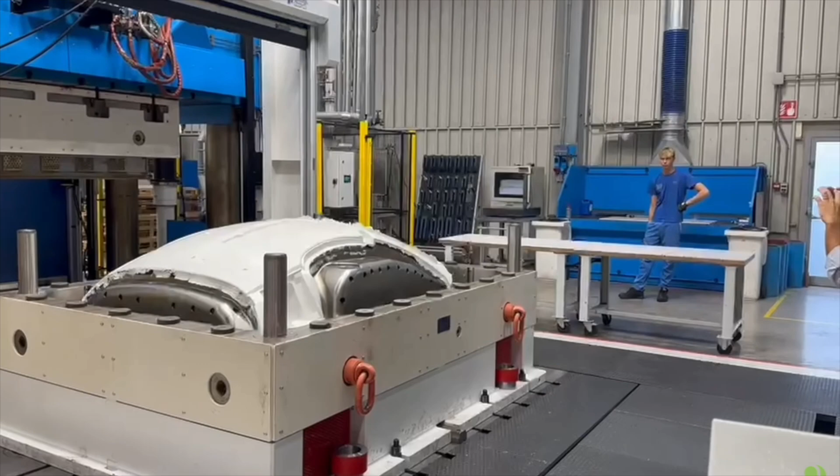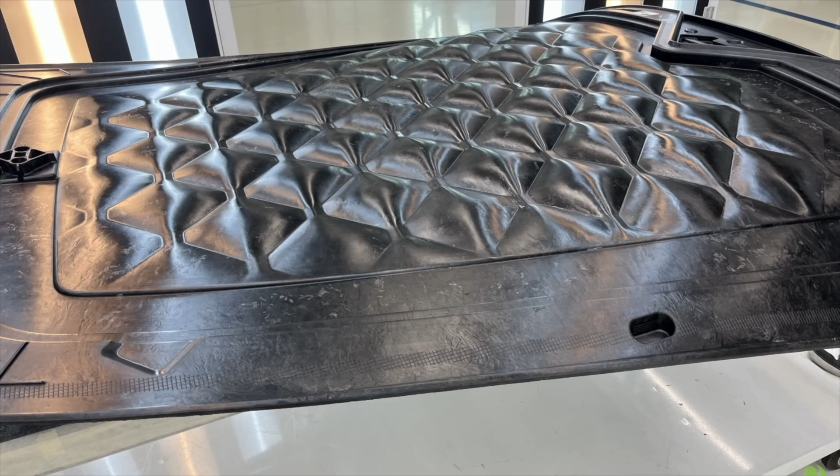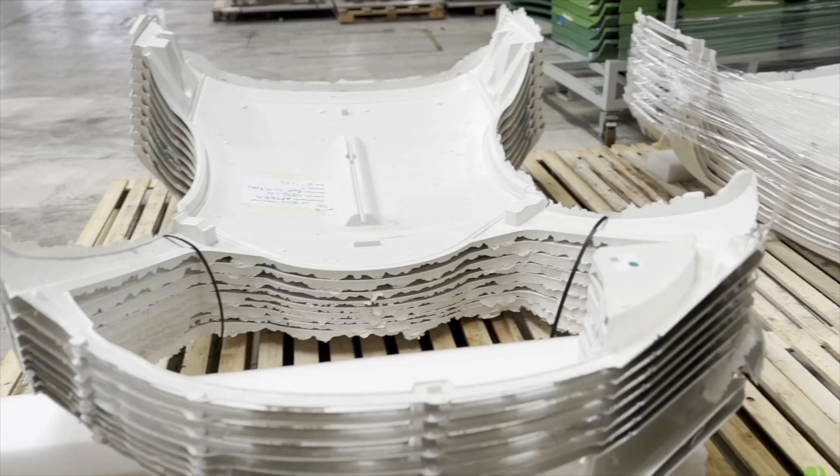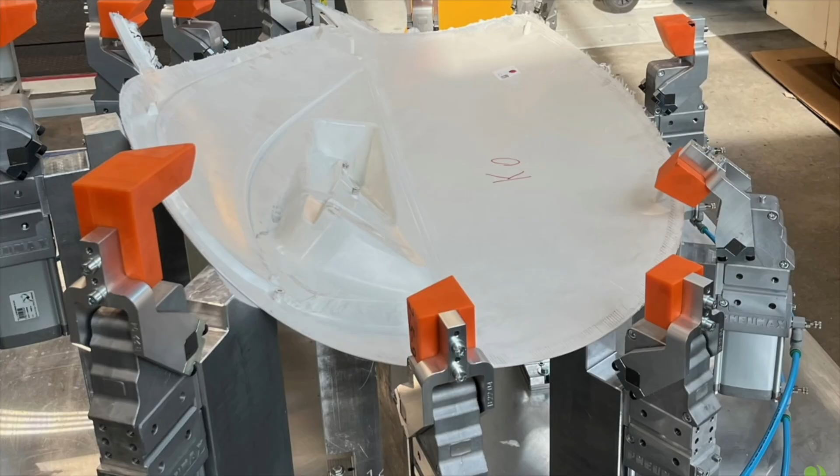Speaking of a better way of doing things, or a different way of doing things, let's back up for a moment. What is the value proposition of the Aptera? How is it different from other EVs on the market today? Aptera has a singular mission: to make every journey powered by the sun. That mission guides us in the development of this product and bringing it to market, but also in our business development for other segments. We have technologies now, this rich IP portfolio that's quite extensive, that can be leveraged in other industries altogether. That vision of every journey powered by the sun is really what guides us.

It's what will guide future product creation. It'll always drive efficiencies more so than any other kind of quasi-competitor in the space, because our focus is on how to make the journey powered by the sun — more and more of the journey, not just 40 miles, but 50, 60, 100 miles. How do we make more of it powered by the sun? That's going to create an eternal pressure for the company to make things more lightweight, more efficient, to always have the most energy dense batteries, the most efficient solar panels, and the most efficient power conversion electronics. That's what will drive the engineering, not market surveys.

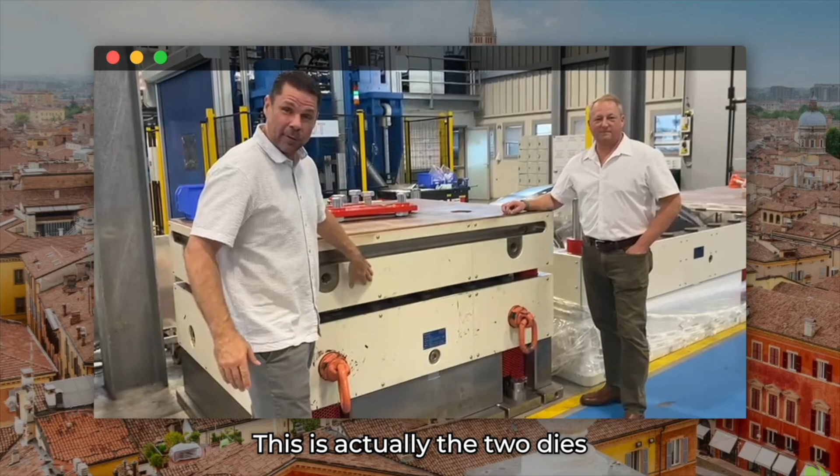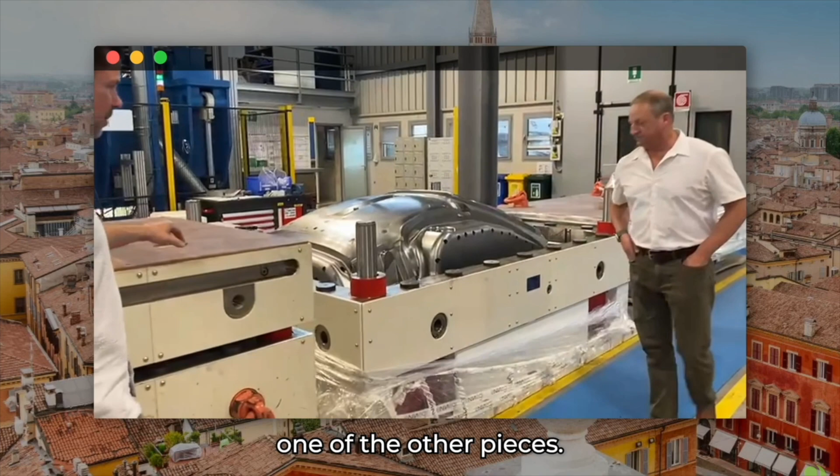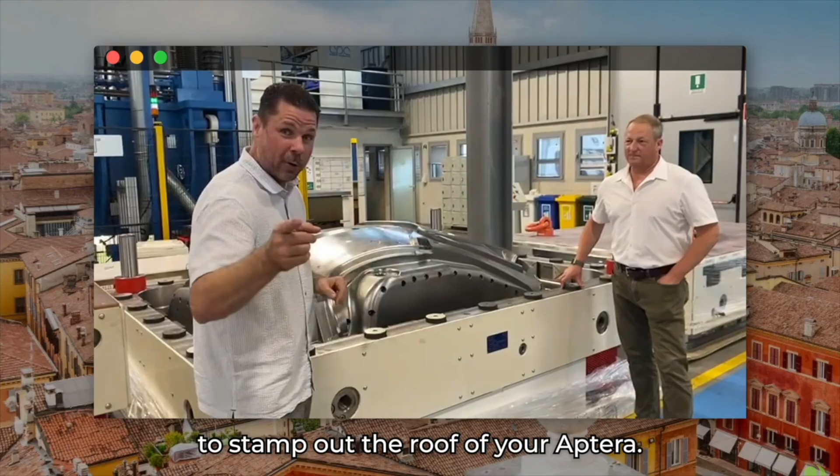But how do we make more of the journey powered by the sun? That's Aptera in a nutshell. That's what we believe, and that's what dictates how we design the product and how we find other revenue streams for our intellectual property. When we last spoke in late 2022, the plan was to begin full production on the Aptera sometime in late 2023. How close is the Aptera Motors team to wrapping up that final 0.1% of the design that will allow the vehicle to go into production and deliver to consumers?

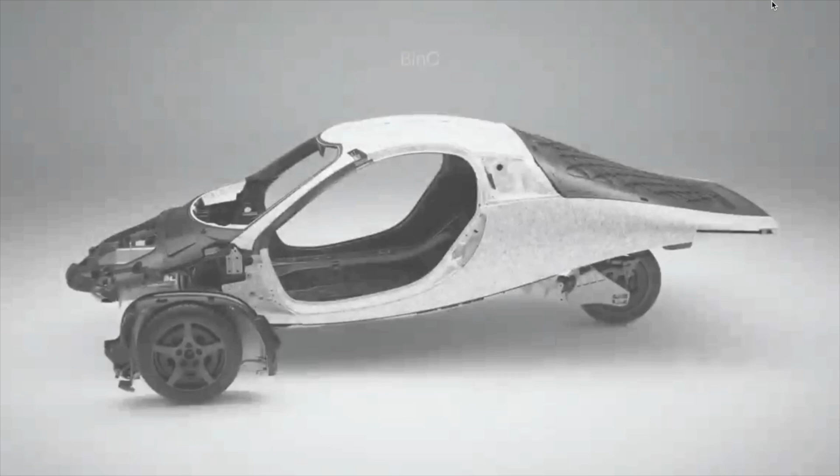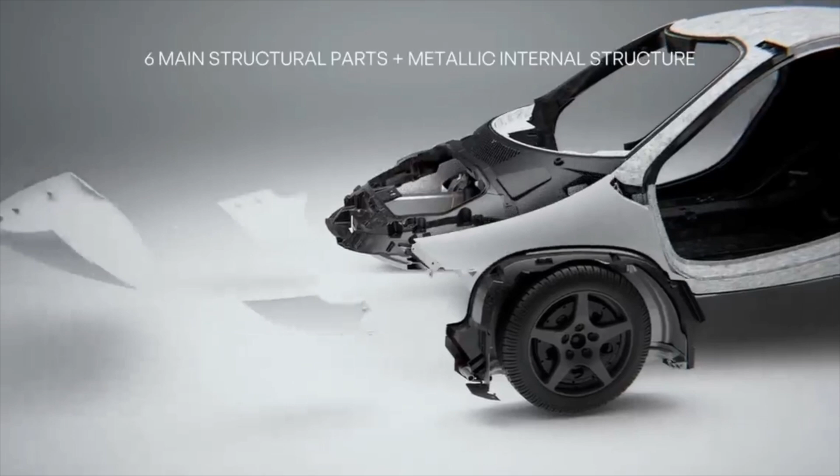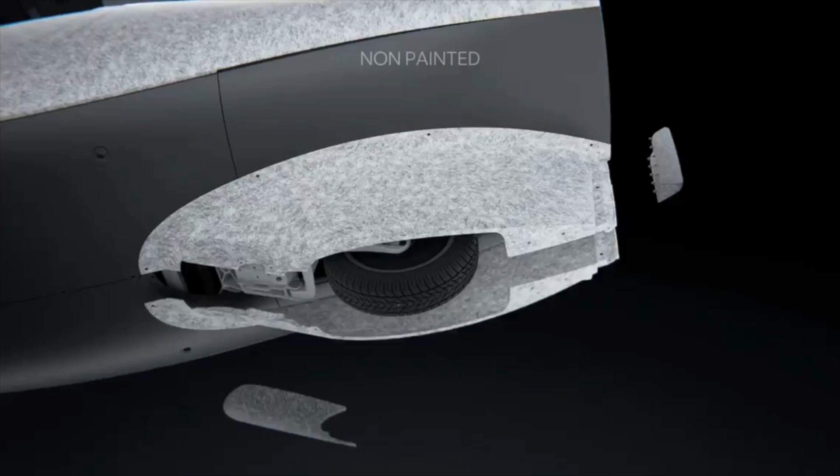I will answer that in two parts. On everything that you can see — what we call the A surfaces, so a solar panel, a light, body structure, things like that — even things you don't see, structures, but mechanical physical things, we are 99.9999% complete. The handful of things that are probably not going to be resolved until we start building the low volume PI builds are left as they are, and we'll resolve those once we start building the PI builds, the production intent builds.

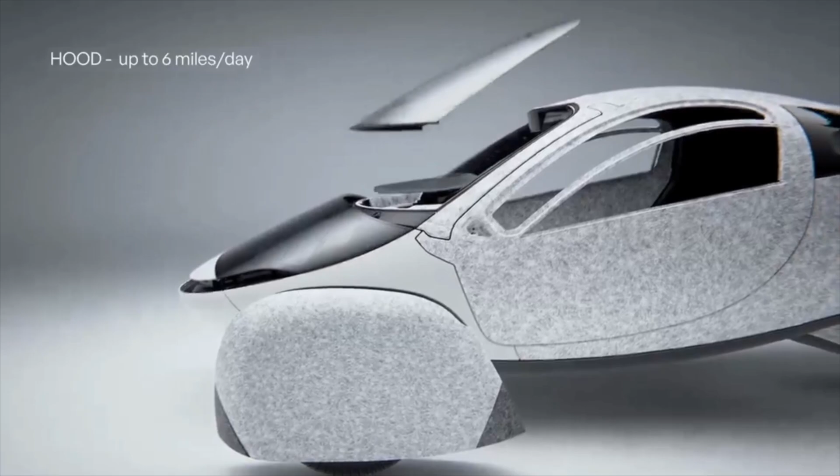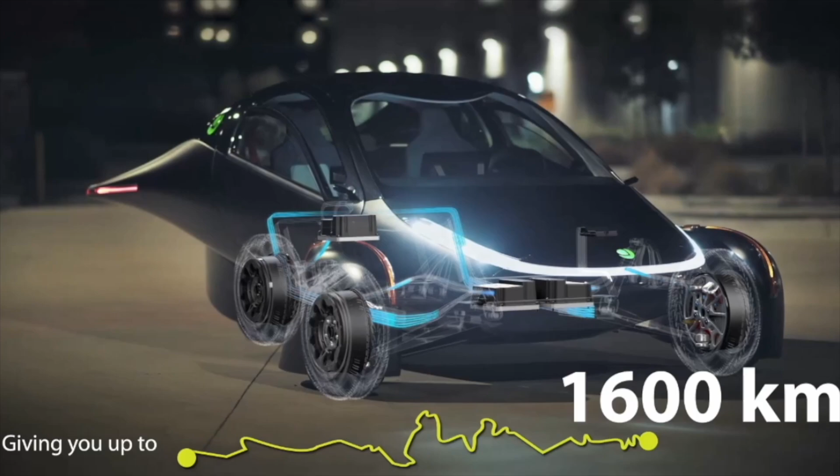So the thinking is we're building the core of the vehicle off of tooled production parts, and the extraneous parts, if you will, some of those may be soft tooled. Some of those we may even change the design because it doesn't function the way we want, like a seal. We've already tooled dies for extruding seals that go around the door and everything else, but there's a possibility we just don't like them, that they don't seal well, so we need to change that.

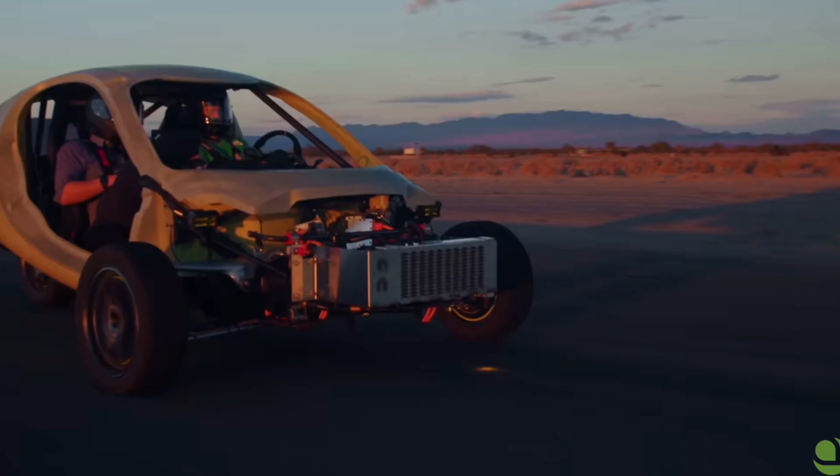I think every manufacturer ends up at that level of completeness. And then of course, once you start production, you have changes you want to do, and you roll them out whenever it makes economic sense. So in some regards, you're never really done. But to get to the point where you're done enough to start production, in all the physical, mechanical things, to my knowledge there's only a tiny handful of things left.

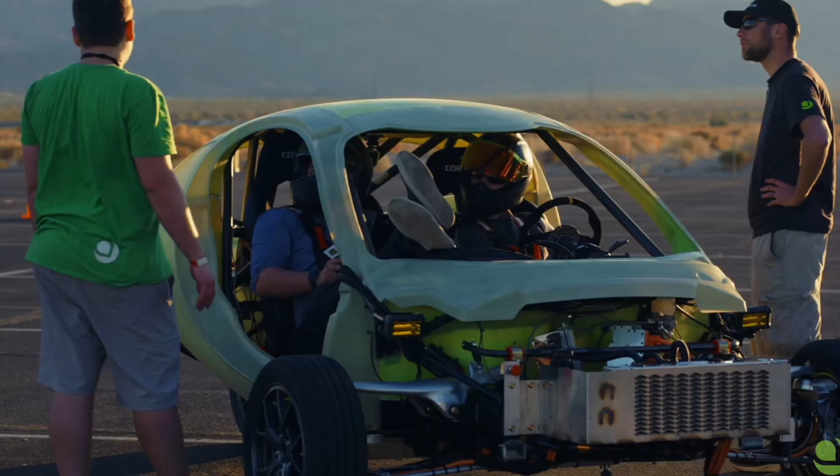What's the difference between the early 2023 Delta production intent vehicle, PI1, and the upcoming PI2? Yeah, so Delta kind of became the PI program, and Delta really represents the final state. Basically, the high cost, big CapEx components that are tooled for the vehicle aren't going to change, because we realized the Delta program needed to be segmented, and that they would all not be the same — that they would be progressively improved upon during the build process.

PI 2, for example, being more mature than PI 1 — as an example, we changed that program from Delta to really the PI builds. So that's the same, that would describe the physical elements, the things you can touch, the structures, that kind of thing.

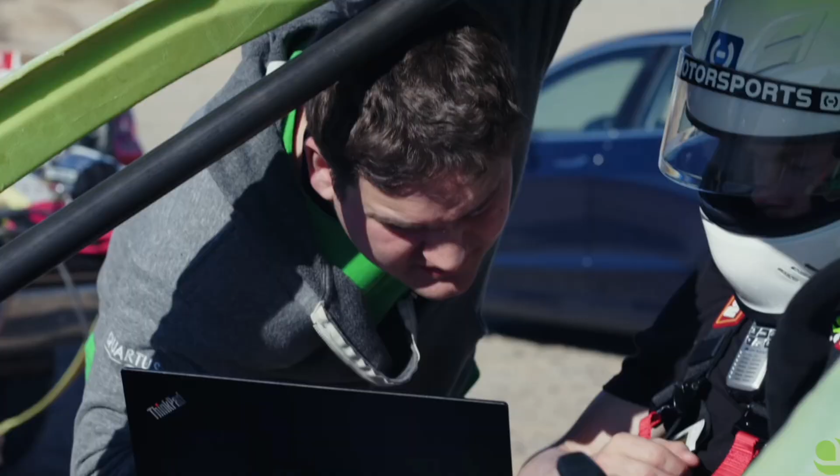On the software side, I would say we still have a mountain of work to do. We will be writing software up until we ship the vehicle. Aptera really is turning into a software company because so much of the vehicle is configured by software. Elements of it are really software configurable. That's different — I think some new manufacturers are doing that, but most manufacturers don't. They outsource all their software and firmware to tier ones. Aptera is incredibly vertically integrated on that electrical hardware, software, and firmware. It's the biggest part of our company now, is writing and testing that.

That part of the program will continue, not only up until production, but it'll continue full speed even after launch, because there'll be update after update after update, as we've seen with many other manufacturers. And we'll be able to push those updates out over the air — you won't have to come into any kind of dealership or have someone come to the vehicle to reflash or anything like that. But it's the only way to do it. You don't stop the software development once the vehicle ships. You want to continue to test, to find bugs, or to find improvements, things that can run faster, to make things more efficient. You might even change the functionality of something. We have that capability now because we control all of those layers.

Yeah, it's interesting to think about how the automobile is pretty old. The first one was patented back in 1886 by Carl Benz. But the idea that a car, or a vehicle in this case, is, to quote Elon Musk, as much a software company as a hardware company, is a rather modern problem of making an automobile. I think confined probably to the last 15 or 20 years — that would not have even been on the minds of an automobile maker for most of the car's history.

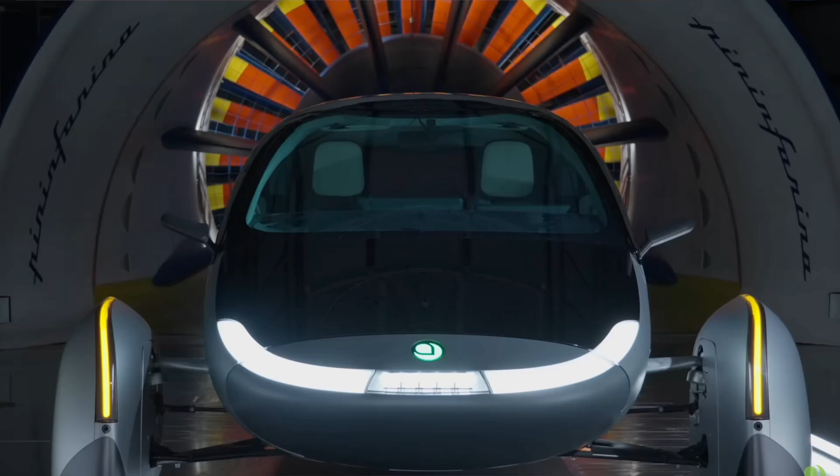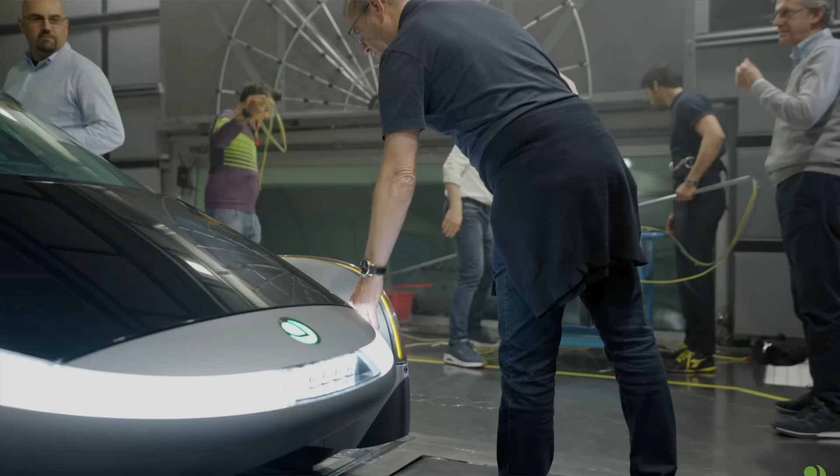Right. And it has its own challenges, but it also has its own rewards, meaning that the customer can have the benefit of continual improvement of the vehicle. It'll actually get better as they drive it. You'll get more range, you'll get new features. Maybe a particular external lamp might suddenly start blinking as a charge indicator, where it wasn't thought of before, but now we determine that it should do that. And we can do that because we control the firmware, software, and hardware.

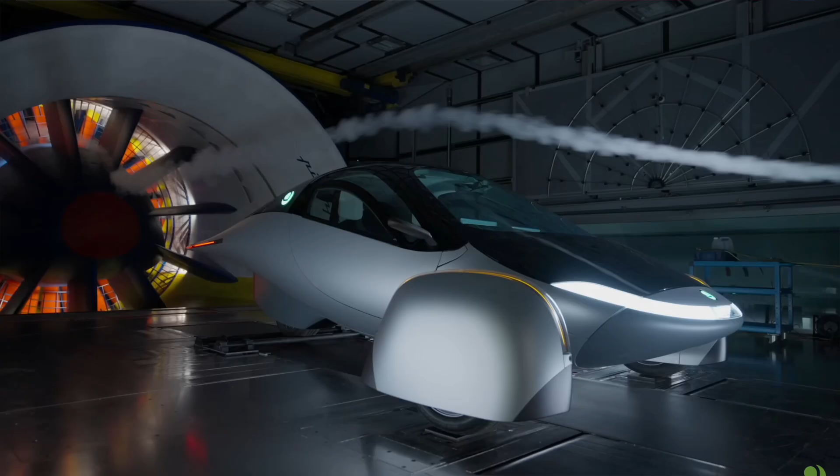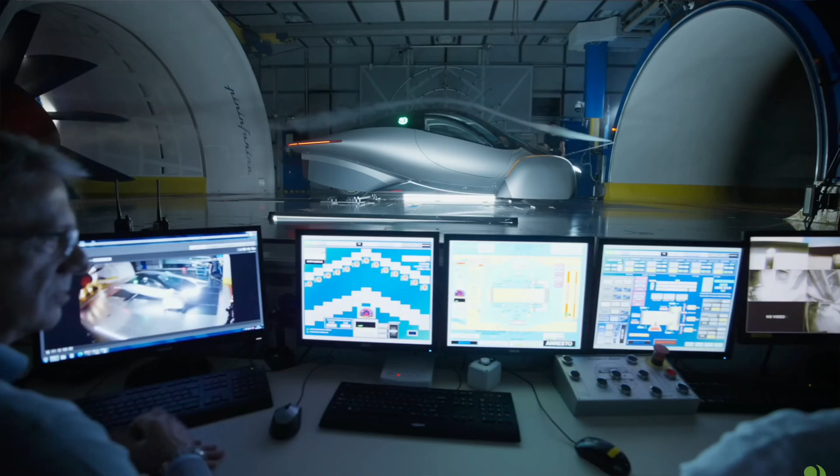I have a neighbor of mine — he works for a big OEM for their electric vehicle division, and actually recently left. He was lamenting that because the particular OEM he worked for didn't own virtually any of the firmware and hardware of the vehicle, whenever a change was needed, it was something that was coordinated with all of the tier ones. It took a minimum of a year, it was tens of millions of dollars. That system does not enable rapid changes and improvements in the software.

It feels like being vertically integrated as a tech-related company is a must these days. Yes — otherwise you're at the whim of people who are making profit off of time and money and product, and taking you out of the loop. I think we have to be 1,000% inside the loop. We control the product and the customer experience.

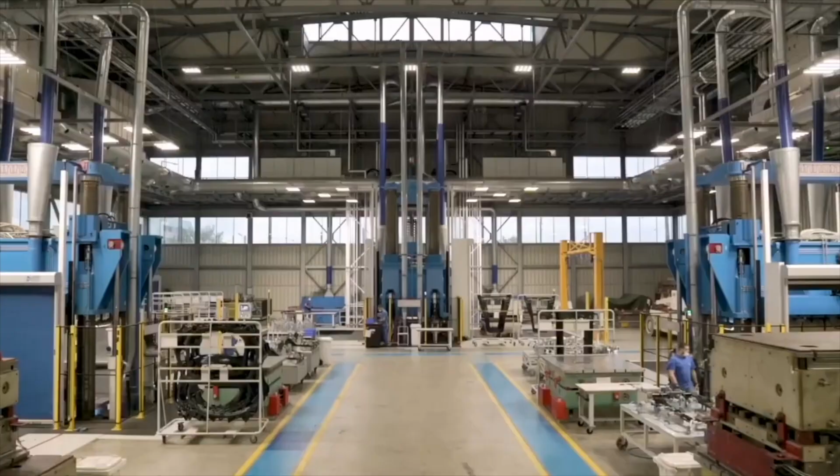There's stuff that we're not going to be vertically integrated with, like glass. We don't know anything about making glass, and there are companies that make glass far better than us. But I have to tell you, since we've talked, we've hired and fired companies doing stuff for us. I don't want to say what or who, but technical things that made us as a company say, screw that, we're bringing this in-house — hire the people necessary to do it in-house because it's going to be cheaper, better, and faster. And that has absolutely proven to be the case.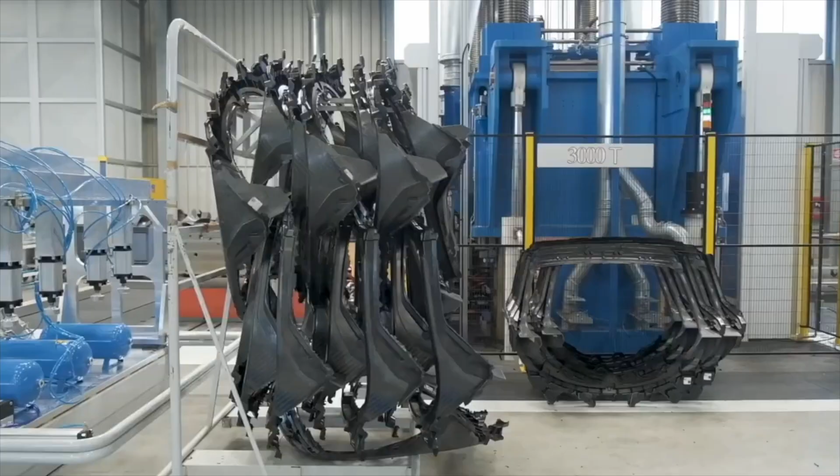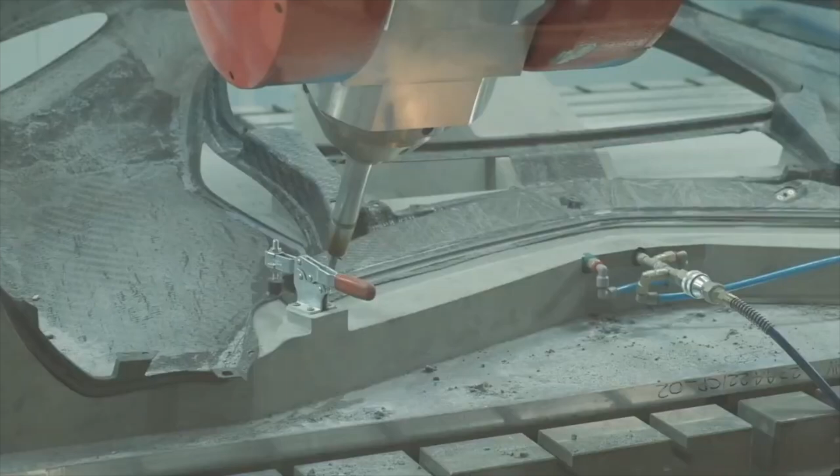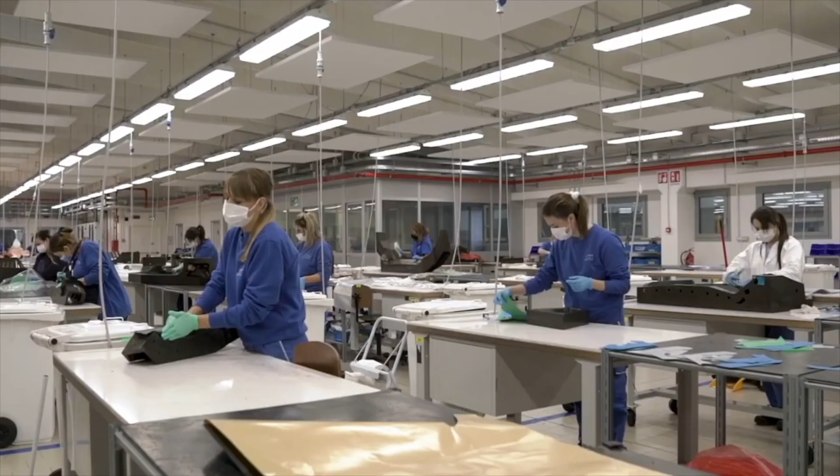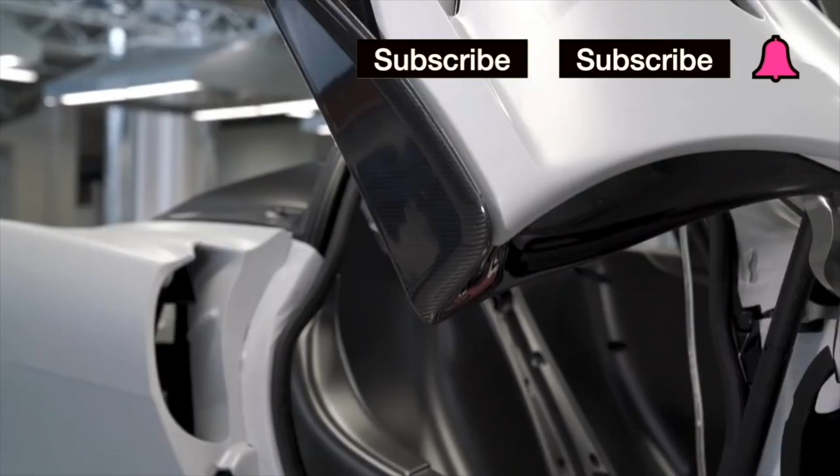In our first conversation, you said, quote, 'We are primarily a solar power company who's focused first on solar mobility, but we see solar power being integral to not only mobility, but so many other needs. And we realized that it couldn't be an afterthought, that instead it needed to be a very large part of the research, development, the intellectual property that we create to make solar mobility possible,' end quote. And co-founder and co-CEO Chris Anthony said in a recent YouTube interview / factory tour with Kim Java, quote, 'We came up with really lightweight solar. It adds less than 8 pounds to the whole vehicle. You can get 700 watts of power. 700 watts of power for a vehicle that only uses 100 watt hours per mile is pretty significant,' end quote. So can you go into detail about what innovations Aptera has made in solar panel development that enables them to be as light as they are?

And can you break down why that 700 watts of power statistic is impressive and explain the technology to me like I'm 5?

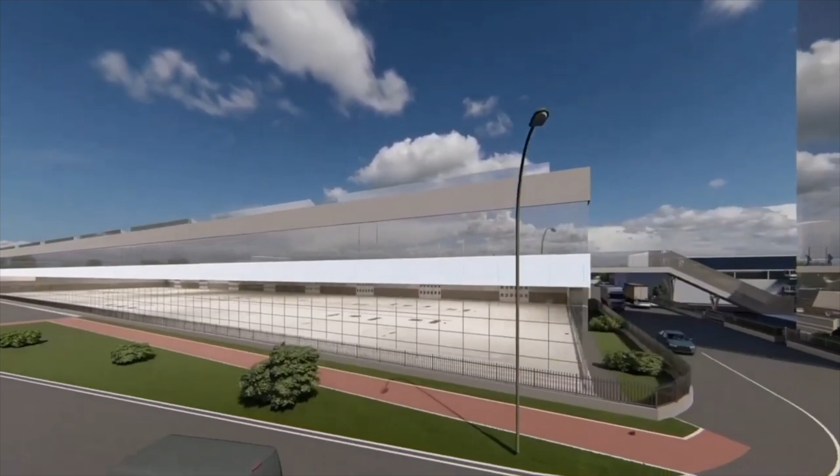The 700 watts is impressive because it's helpful not to think about the instantaneous power, 700 watts. It's helpful to think about the kilowatt hours, the energy stored over a day. That 700 watts times so many hours. Now, it's not 700 watts all day, it's a peak of 700. It'll be 200, 300, 400, 500, then peak at noon at 700 and ramp back down. Over the period of a day, that adds up to 4 kilowatt hours here in San Diego.

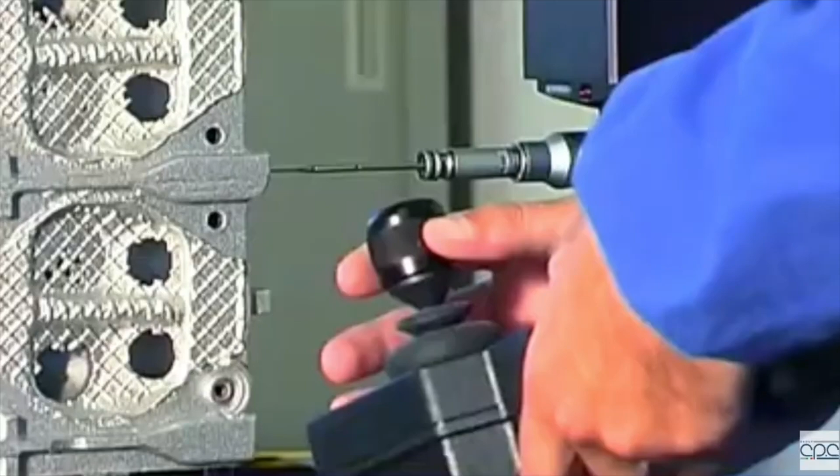So 4 kilowatt hours for us is about 40 miles of range, because we burn about 100 watt hours per mile. It's really hard for people to get their head around it, but it basically decouples you from the idea of the fuel station or home EV charging, or having to charge the vehicle at all, except for long trips. But people don't do long trips every day. People drive an average of 40 miles a day. So that's why it's meaningful - that number completely, on an average basis, decouples Aptera from the grid.

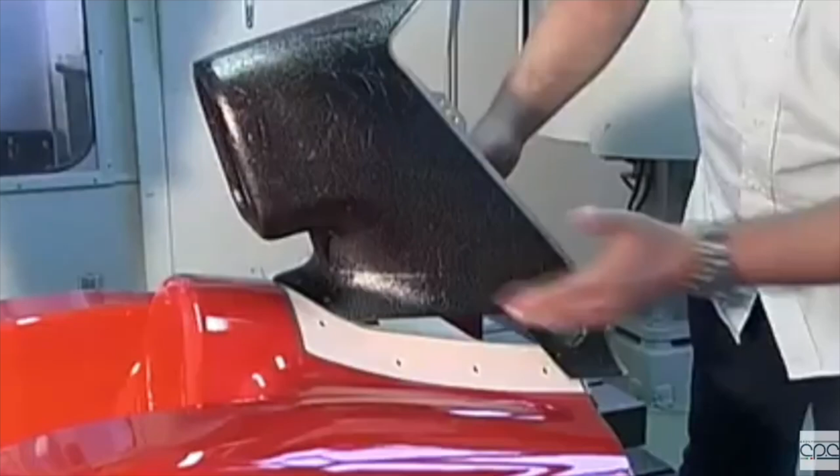The average American commute is about 40 miles round trip. So if we could take that average commute, which is where virtually all of our CO2 production is, which is where virtually all of our petroleum combustion is, and take that out of the energy ecosystem altogether, it will be a massive transformation in how we use energy in the country.

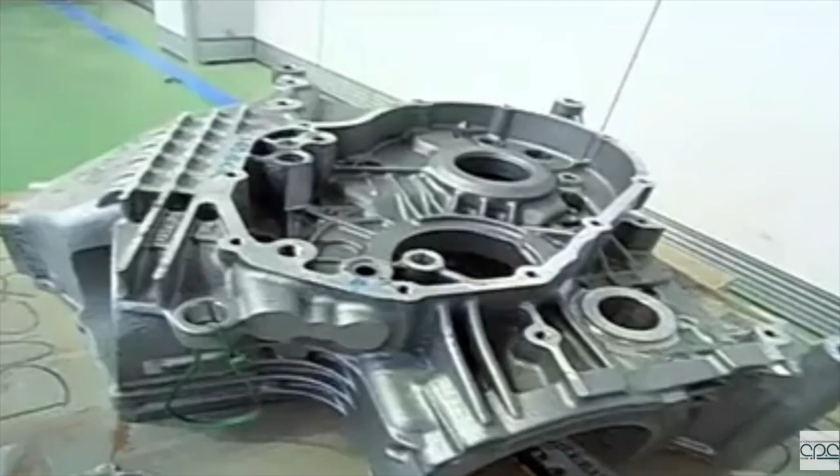And that was why we ended up at that number, because we were asking ourselves, well, how many cells can we fit on the vehicle? What if we just cover the whole thing with solar cells? Because it's that important - the vehicle is so efficient, every single cell we add onto the vehicle is an appreciable amount of more range. So that's the meaning of that number.

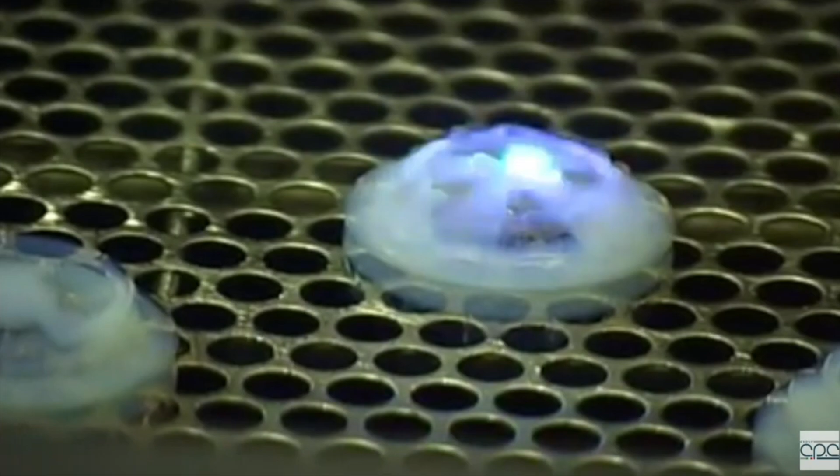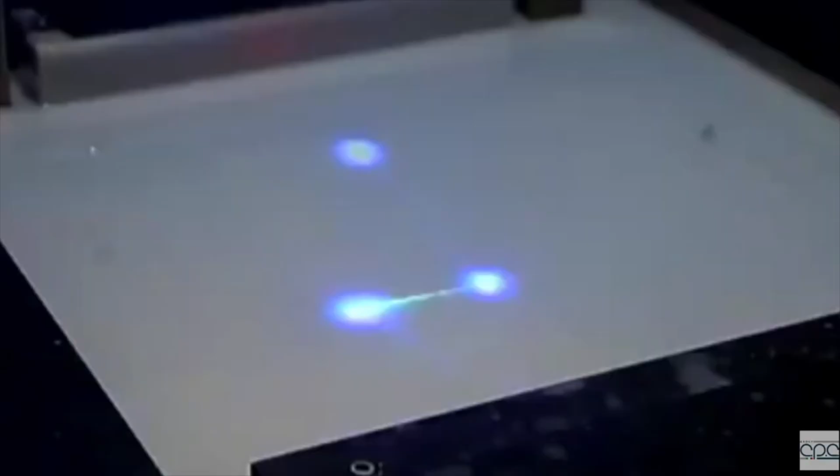Now, you asked about the process - through Google Patents, you could look at our latest patent. It was issued a couple weeks, maybe months ago, on the solar panel production process. That patent is really the result of almost 3 years of work. It's 60 pages, an extraordinary amount of work by the team, and it defines those processes and how to do it.

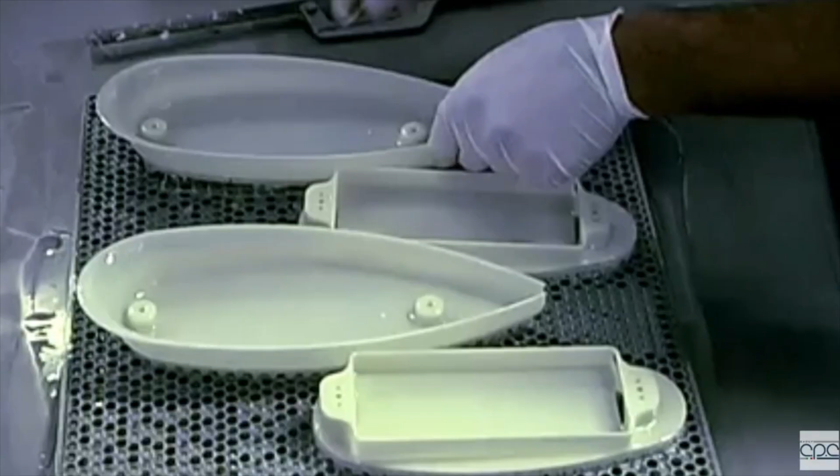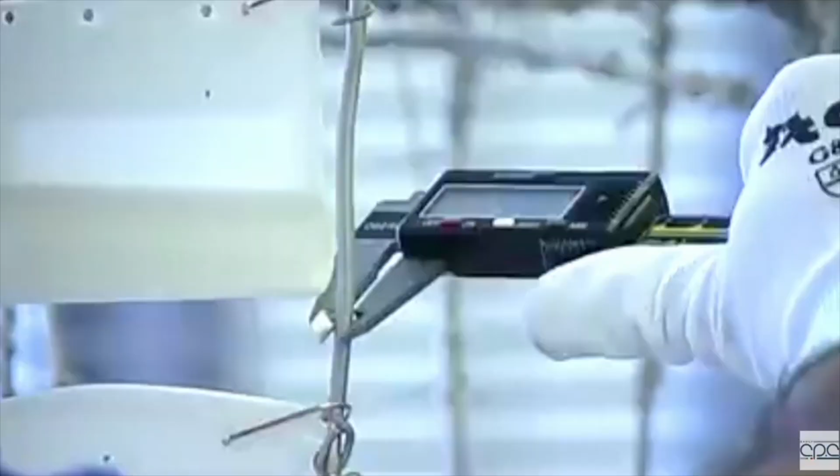The reason why that is important is because when we went to who we thought at the time were the experts - the former team from Airbus that made the Solar Impulse plane, that solar plane that flew around the world, which had curved wings with curved solar cells around them - we were surprised to learn they had no thought as to longevity. They were even skeptical that any of those solar cells worked at all anymore because of the vicissitudes of vibration and bending and cracking.

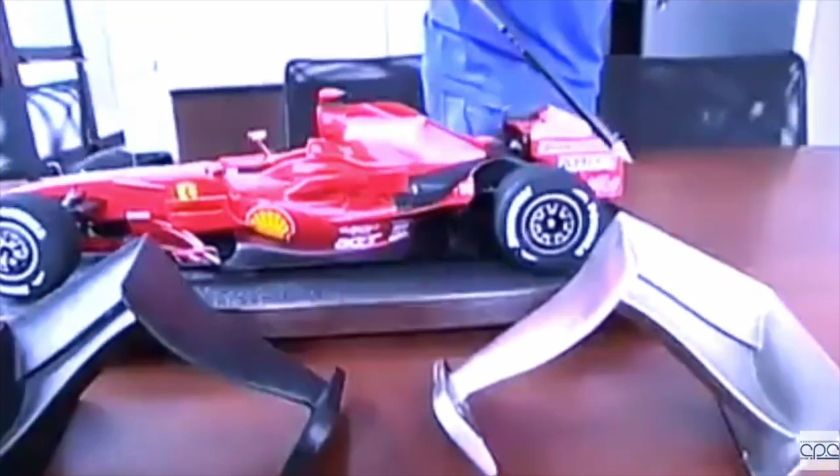Part of what makes it unique is that you can't just put a regular solar panel on a road vehicle, even an RV or a boat, because of the bending and vibrations and everything else - it destroys them very quickly. Not that you can see it; you can't see that destruction. The panel looks fine to the observer when you test it for its power output.

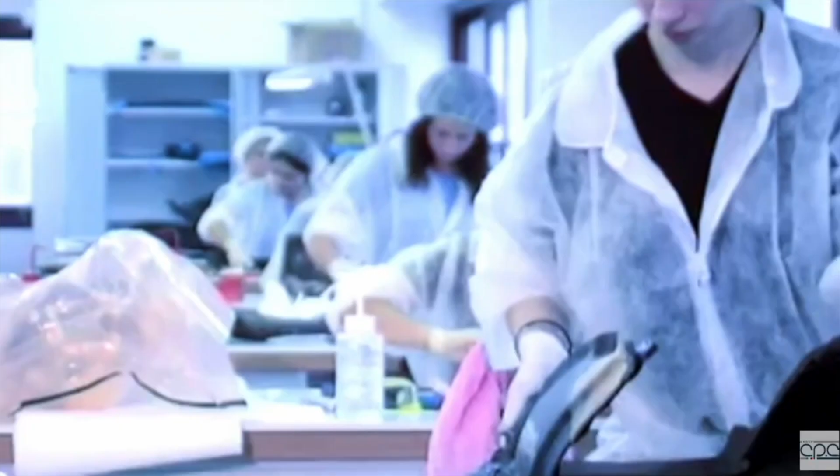We have ways of examining micro cracks in the crystalline structure as part of our IP. We developed that so we knew we weren't damaging them when manufacturing. When you look at all those things, you realize very quickly these panels won't last more than a couple of months on a road vehicle. So you have to do something different.

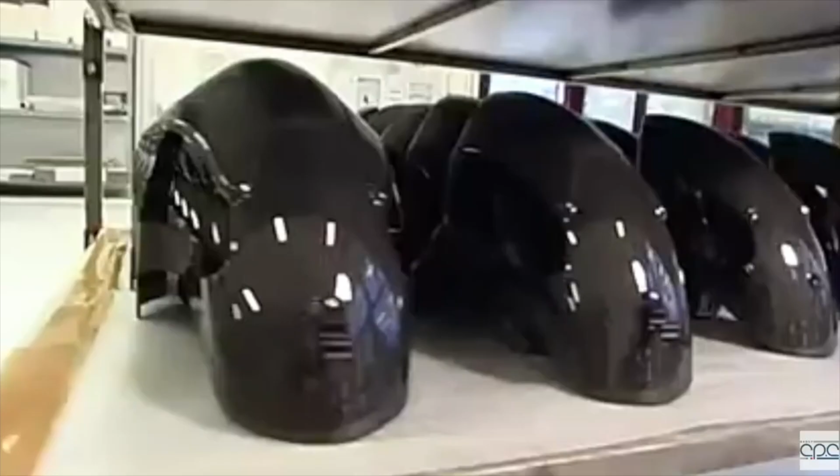So is that the key innovation there - the durability, the idea of a curved solar panel, or to quote the 1988 patent, contoured solar generator? That's been around since at least the late 1980s, but it sounds like the innovation here is the durability aspect.

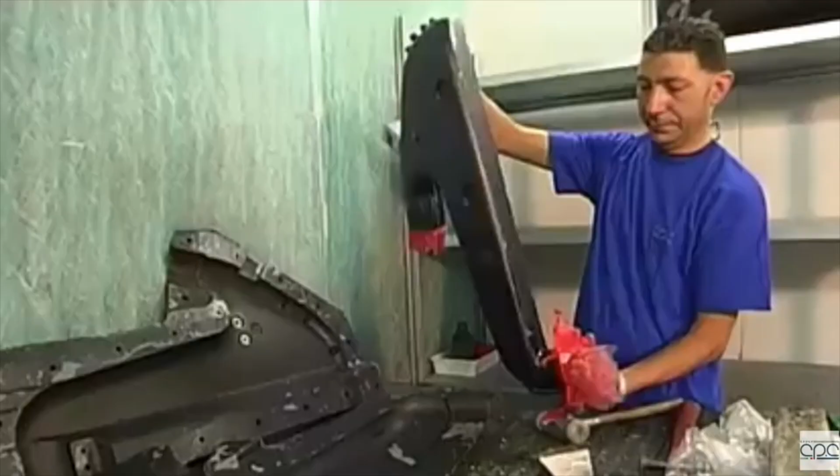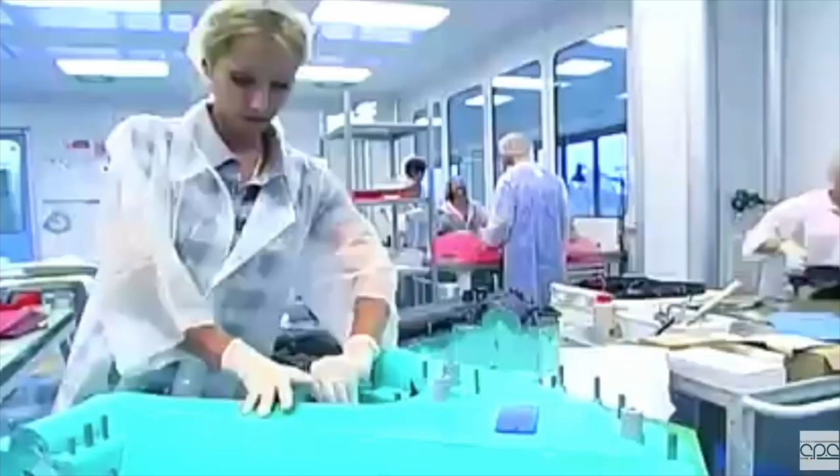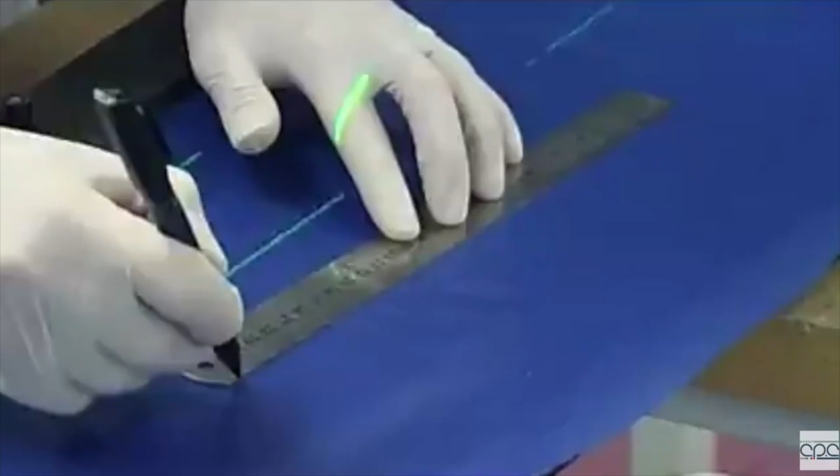Yes, the compound curve - not just curve, but curves in two directions - coupled with durability necessary for automotive use, coupled with a very favorable weight suitable for automotive use. Lightweight and durability, really, that's the primary thing. That polymer stack we have for the encapsulants, the formulation of it, the recipe, and how and when and where it's heated and under what pressures - it's like a recipe, so to speak, like for Coke or the Colonel's herbs and spices for his chicken. And that's what's necessary to make a panel that lasts for 15 years, continues to provide power, doesn't degrade, and is also lightweight.

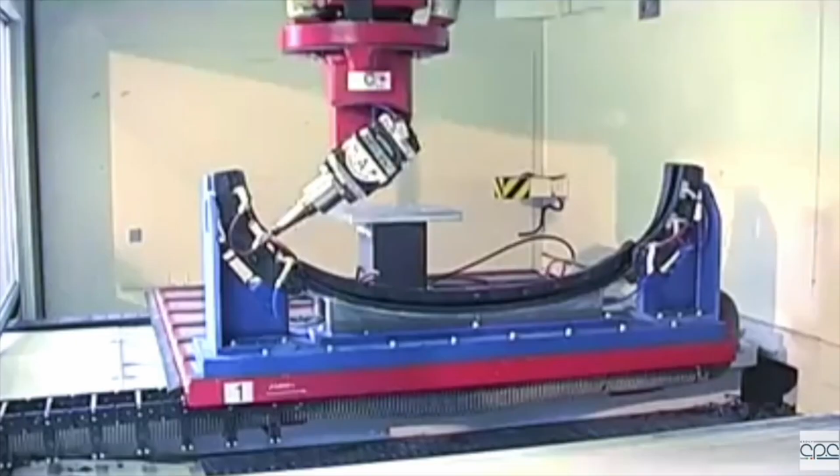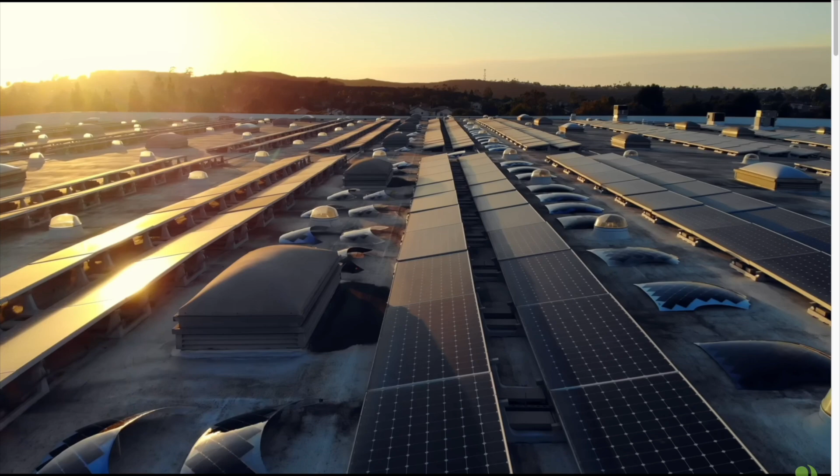Steve Fambro brought out that their mission is to make Aptera vehicles go 40, 50, 60 miles, but also to completely disconnect transportation from the grid, getting all your energy from solar power, whether that's small vehicles or large vehicles, so you don't have to plug in at all. That's a pretty big task, but I believe they can get there.

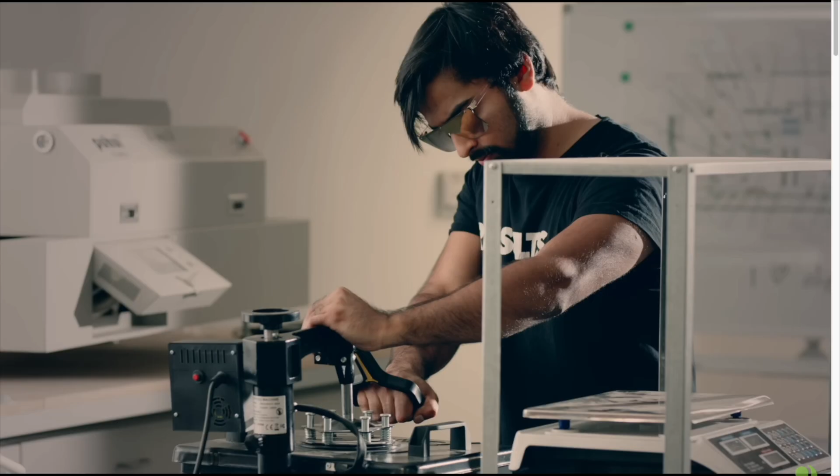They're already on their way to getting the solar range improved and produced on other vehicles. He also talked about the PI1, which is practically already finished, that has to be done now. But the PI2 probably won't be finished until the end of this month, July, beginning of August, so we'll hear more improvements on that stage of the vehicle.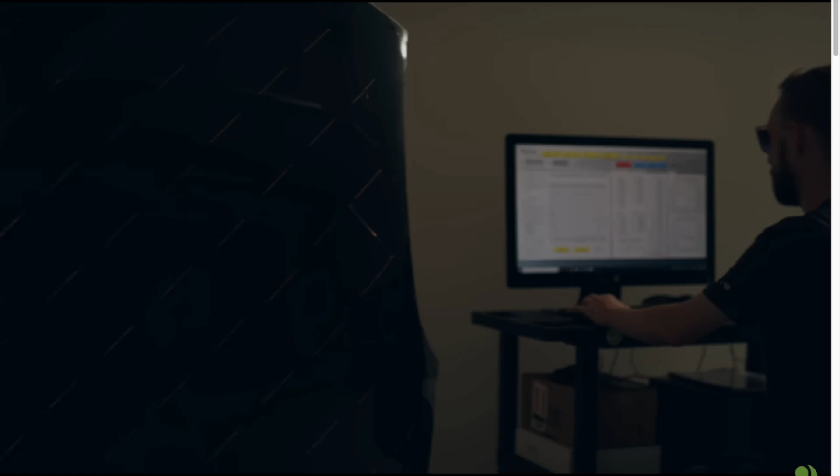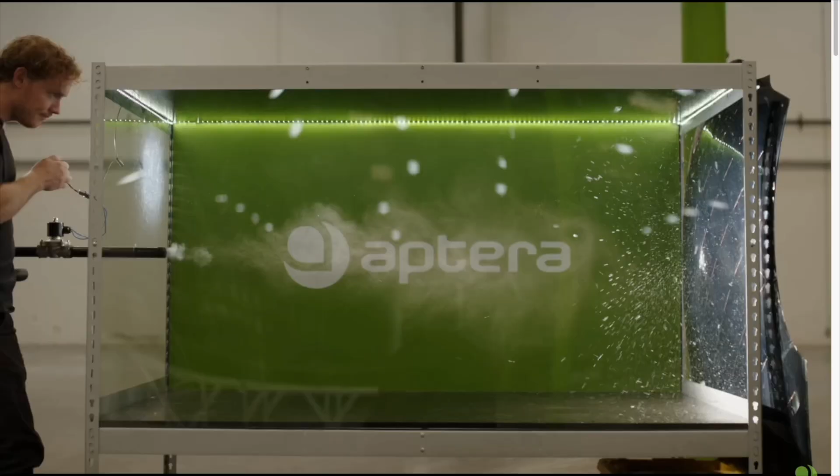Also, Aptera is going to be more than an automotive company, they're actually going to be a software company, especially since they're giving over the air updates. There's going to be a lot of changes with that, you'll probably get more mileage, and like he said, there'll probably be a blinking light showing the charge rate of the vehicle, when it's starting and when it's almost completed. I think that would be very good.

But they also have to continue with software updates because of maybe bugs and hacks, somebody trying to hack into your vehicle. That's going to be a continuous thing, so you can be protected from thieves and hackers. That's going to be awesome as well.

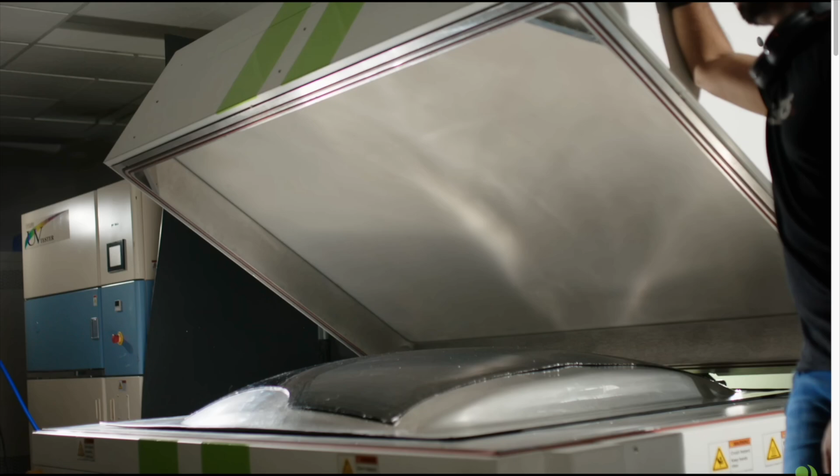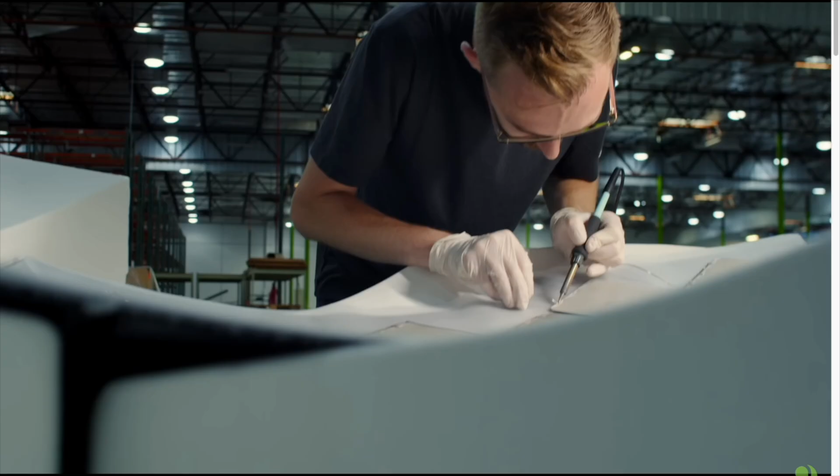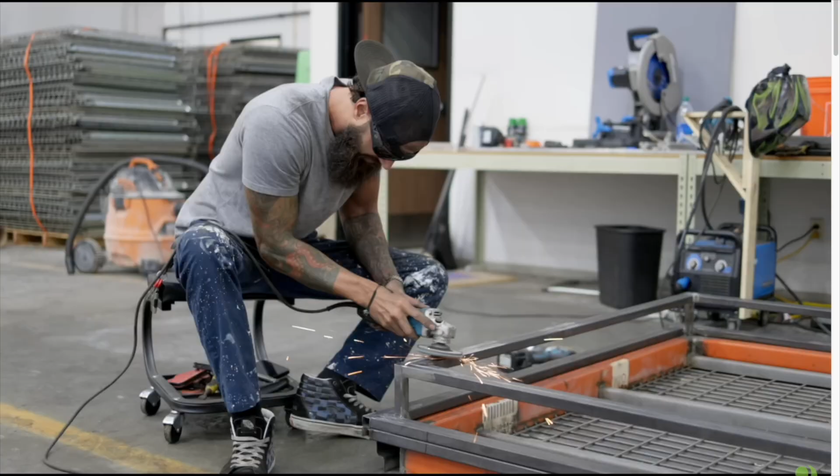He also brought out that they're making a lot of in-house products, which is going to help save Aptera a lot of money as well as bring in money. He said they were working with some companies they had to let go because they could make whatever it is in house. That's fantastic, so they can get the vehicle out on the road a lot sooner than waiting for somebody else to produce their product. I see a lot of positive things with that - that's what helped Tesla get out in front of the OEMs. So Aptera is doing a lot of wonderful things.

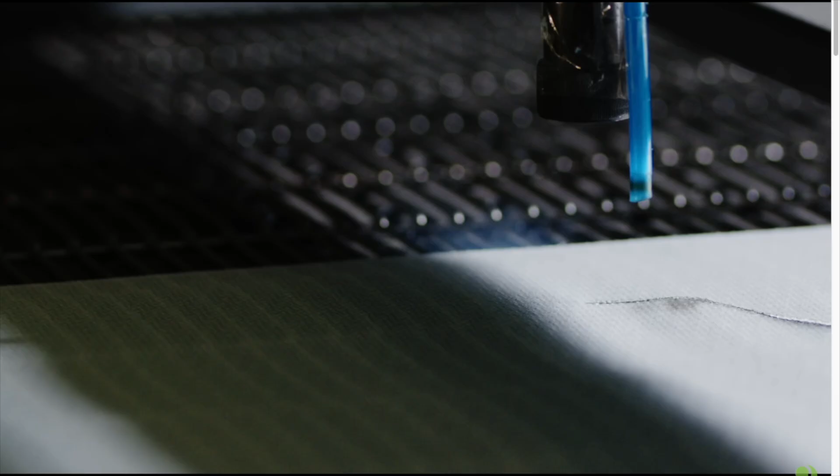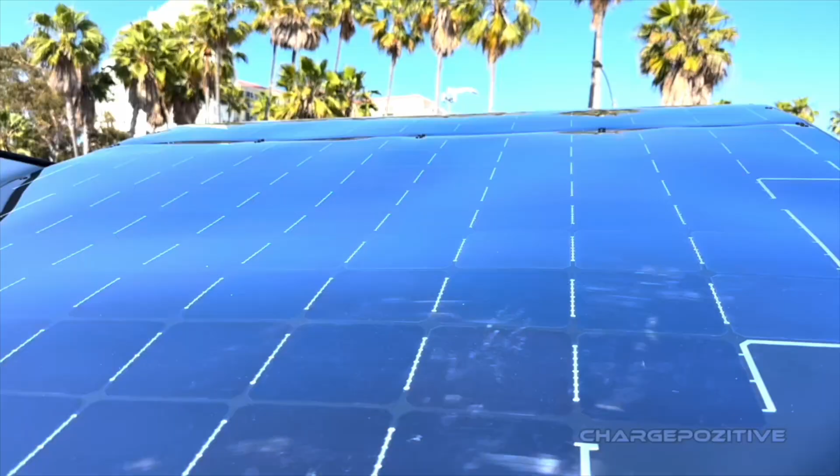One of the things helping them out is their solar product. They're designing their own solar product for other companies, and I think that's fantastic. One company that comes to mind is Polydrop - you can see how they take the panels they're making and design them to fit the actual size of the top of the vehicle, which means full coverage and the maximum amount of solar panel on the vehicle.

The Polydrop panels can take in about, I believe they said, 1,300 watts of power. That's just practically awesome, as well as with Aviates baggage vehicles working at airports that collect baggage and take them from the airport to the airplane and vice versa. So Aptera is doing some fantastic things.

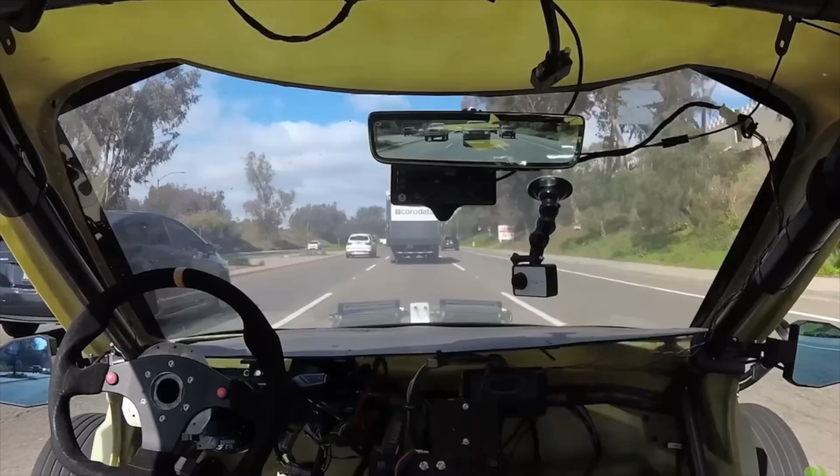But tell me how you feel about what all Aptera is doing. For me, that's very exciting to see that they're on this mission, wanting to take every vehicle that uses oil, gas, or diesel off the road, to where you don't even have to plug in, where you just get all your energy and power from the sun. I can see that as an actual process they can do - it'll probably be gradual, but I can see them fulfilling that if they stay on their mission. Tell me how you feel, how you think about everything Aptera is doing.

They're actually going to grow into a really big company, and I can see them doing some fantastic things in the future.